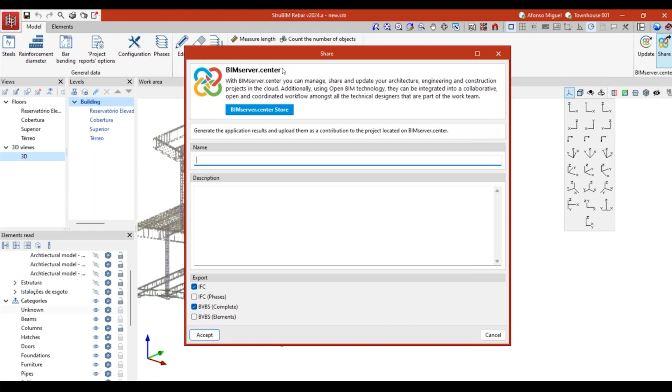Let's jump to steel structures. Okay, for steel structures, I've selected three or four of them. So the first one I would like to share with you is related to a specific new option that we have in CYPE Connect and StruBIM Steel. In both of them we have the same new feature. I'm starting here with CYPE 3D.

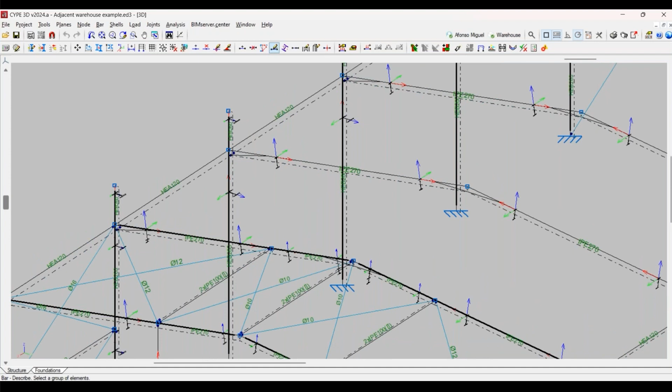So here I have this warehouse that is created by two parts, and in this warehouse I have one specific section here. If I describe one of these bars, for example this bar here, you see that I have not a simple section, but a simple section with haunches. The haunches are reinforcements that we can create in the initial or final part of the bar, or in the top or bottom of this bar, to have a better connection.

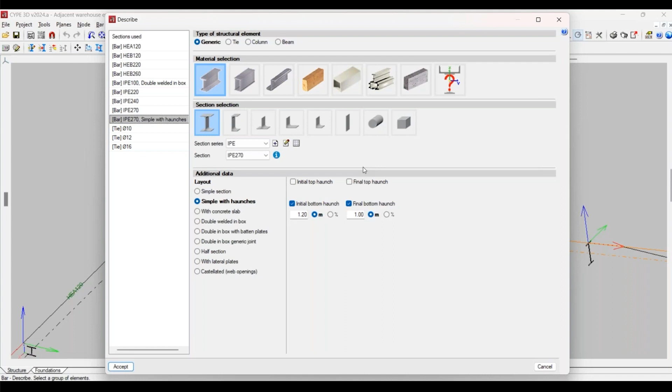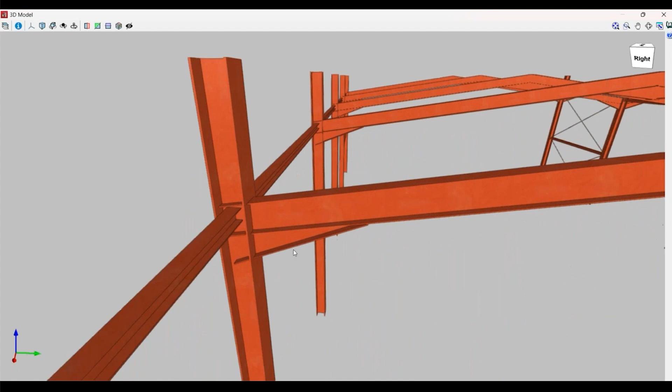So in this case, for this bar, I have this haunch here, and another one at the end of the bar. Actually, if we go to the 3D, it's going to be easier to see. So let's jump to the 3D view, complete structure. Here we can see these haunches. Sorry, this was the start one, and this is the final one. And in the other bar, we have a similar situation, so we can create this effect.

This is something that has been available in CYPE 3D for a long time. It's not exactly a new feature, but the new feature is that now, if I connect this project with BIMserver.center, and this is the option, here I have the name of the project and my profile. When I export it to BIMserver.center, I can open this structure in CYPE Connect or StruBIM Steel and keep modeling it to have a detailed model, or to analyze the connections of this structure.

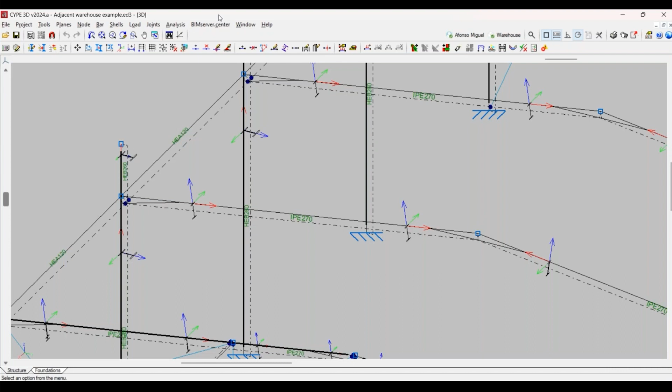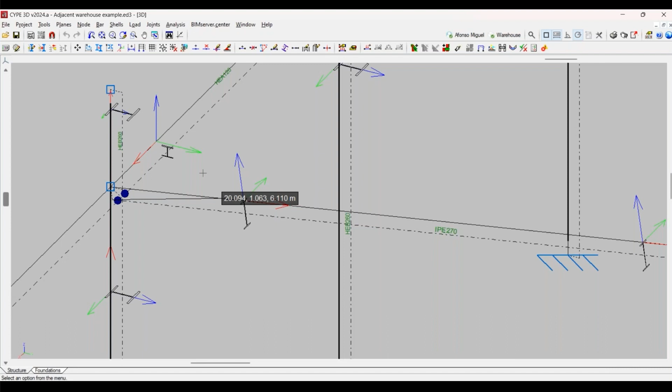The new feature is that when I create this kind of connection with haunches, now I can export these haunches with all the forces, all the combinations, all the results of the analysis reaching this node to CYPE Connect or StruBIM Steel, and then keep working there. So now you can also export the haunches to CYPE Connect or StruBIM Steel.

So let's create a new project here in StruBIM Steel, although in CYPE Connect it will be quite the same. And let's import this model that I previously exported from CYPE 3D to BIMserver.center. I will select one of my projects. You can see that the BIMserver.center environment is the same that we saw in CYPE Architecture. Let me filter by my projects; I created before one project called Warehouse, the same that was created in CYPE 3D.

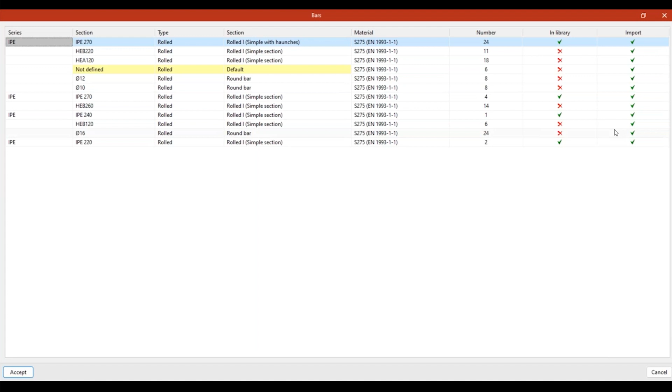Inside this project, I just have one contribution, called Structure. It was the structural analysis of the structure. Let's import this contribution to StruBIM Steel. StruBIM Steel is importing the model, and here I can see there are a lot of profiles that were modeled in CYPE 3D that are not available in my StruBIM Steel library, but I can import them now, and then they will also be available in my library. So let me import it.

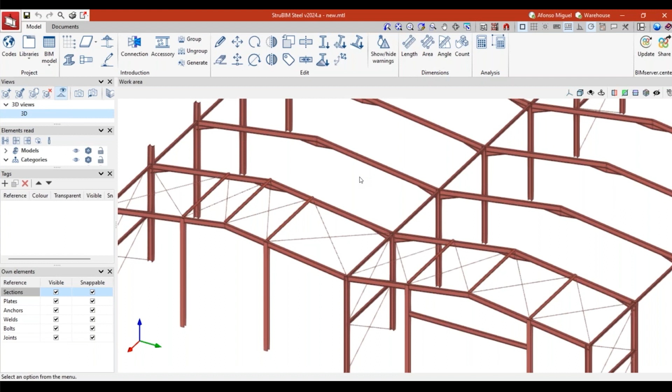Let's wait for StruBIM Steel to prepare the work environment, and we'll see the structure here. Okay, everything was imported quite well. Of course, everything is the same color. We don't have any tag yet, because we don't have any operation created. We are just starting with this model. The idea here is to detail it, so we can create groups of elements, model our connections, then create our documents. The point is that the haunches are here. We can see this section has the haunch here, and the same here.

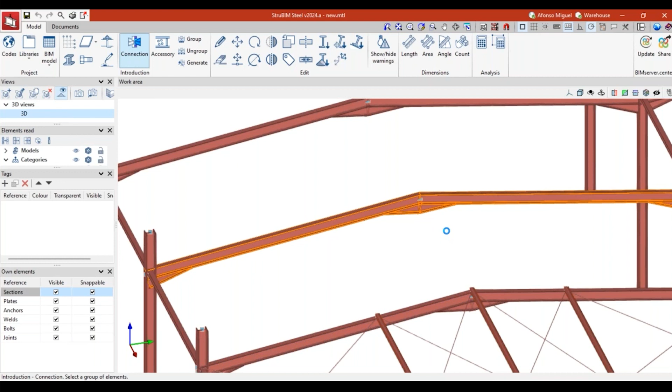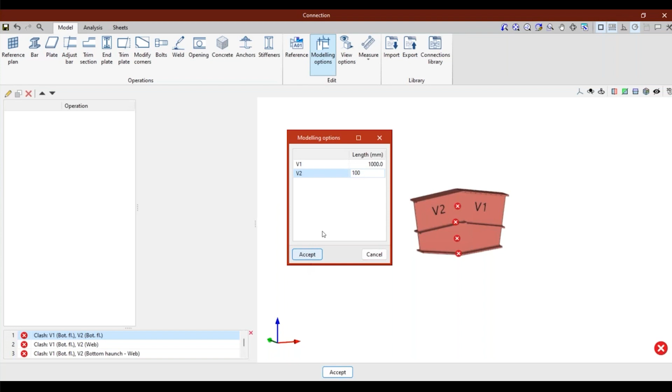If now I create a new connection, for example selecting this bar and this bar, let's see what happens. When I create it, I actually have the haunches inside my connection. Let's adjust the size of our panels. For example, here we can change the size of the section that we see in the connection. Let's put 1 meter in V1 and 1 meter in V2. Then we can see that the haunches are available here.

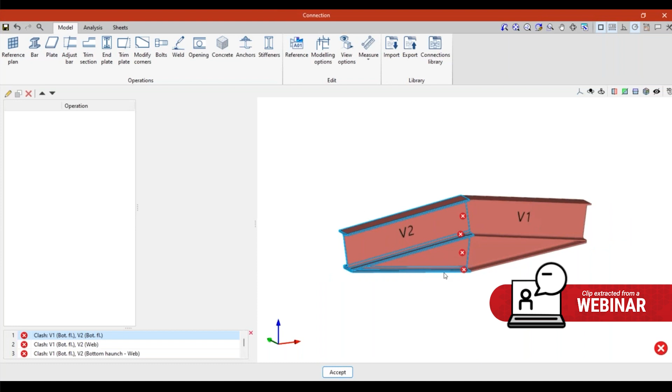Of course, now we must start adding all the operations to adjust the profiles, to add bolts or welds or plates. So we must create our connection here to provide a real solution to this node. But this is not the point of this presentation; we have a lot of tutorials about that on our website. The point is that now you can see the haunches here. It's available. Now you can detail this kind of structure too.